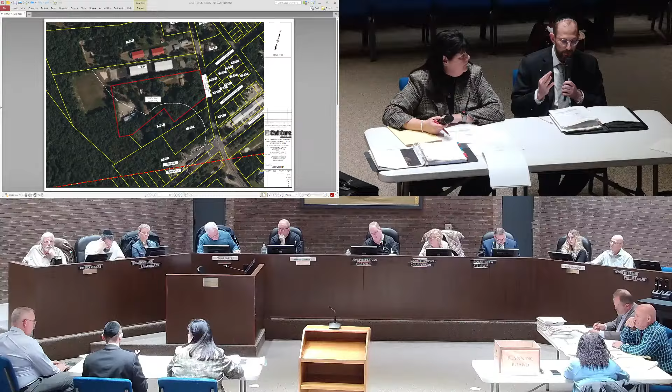As noted, since this is within the Pinelands area, a letter of interpretation does not apply. A letter of interpretation is issued by the NJDEP, Department of Environmental Protection, to verify wetlands, but that only applies outside the Pinelands area. The Pinelands has jurisdiction over the wetlands, and they verify them through the certificate of filing.

In the certificate of filing we received prior to this application, there are certain conditions that have to be met. Yes, and the applicant will meet all those conditions before receiving final approval. After we submitted to Pinelands, we received a certificate of filing, an inconsistent certificate of filing. They issue that when they feel your plans are substantially conforming, and the last remaining items can be cleaned up later. So they won't issue an inconsistent certificate unless whatever is left is relatively minor.

The process is they then direct you to proceed to the local municipal and county boards. After the project receives municipal and county approval, you return to Pinelands to finalize the outstanding items, and the approval cannot take effect until we receive a letter of no further review from Pinelands. It's not even possible for Pinelands to accept an application right now for those items. So it's inconsistent, but we remedy that after any other approvals.

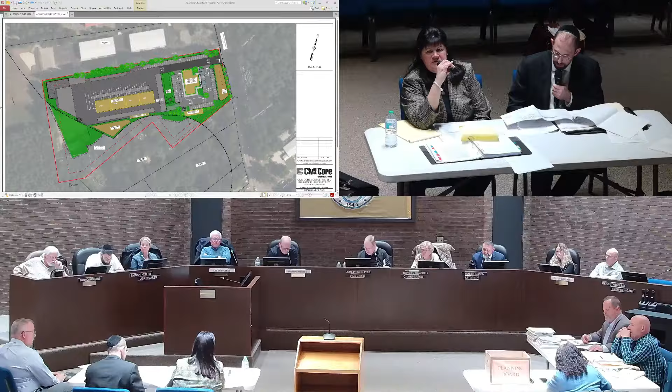Thank you. When we do, can we verify what, if any, utilities are in those? And I guess from your planner or some witness, if they're expected to be considered accessory structures to the principal uses on the site? Yeah, the storage shed is supposed to be accessory to the office building, and the pipe shed is accessory to the warehouse. It's expensive pipes that are in there, so they don't want them mixed up with everything else - that's what's special about that.

In terms of utilities, the pipe shed, I don't believe that has anything. The other shed, I think, will have lighting in it. I don't believe it has any other conditioning or anything. We can have the architect also answer that question.

Mr. Clee? Just quick - up the microphone please. I'm sorry, thank you. The environmental impact statement - do we have the preparer of that document, Mr. Dubois? No, they're not here. So, any questions about the impact statement?

I can try referring to it. I was not the one that prepared it, so it depends if it's something I'm qualified to address. I'm just more questioning threatened and endangered species. This is within the Pinelands, and the Pinelands regulates threatened and endangered species very heavily. They regulate not just within wetlands like the DEP does - their method of enforcing threatened and endangered species protection is through wetland buffers. For example, typically you have a 50-foot wetlands buffer, but if there are threatened endangered species, they extend that to 150 feet to provide protection, and that's really their only mechanism. Pinelands, on the other hand, can regulate what we call uplands - areas outside of wetlands - for threatened and endangered species.

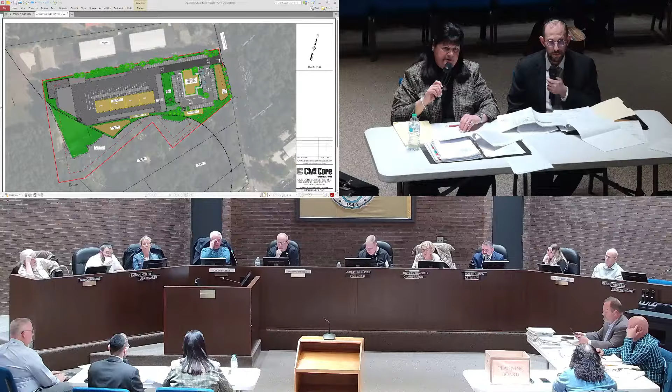I would have to bring that specific person here to answer that question. I can't answer that — I'm not qualified. Understood?

Just to be clear, this application is going to be conditional upon a no further review letter and a no call-up letter by Pinelands, correct? Right. All of this type of information is within the jurisdiction of the Pinelands, not this board.

Specifically, this application is going to be conditional upon Pinelands providing a no call-up letter and a letter of no further review, correct? Correct. So we wouldn't be able to put a shovel in the ground without Pinelands signing off. So any inconsistencies have to be taken care of. Correct — just like every other outside agency that has jurisdiction over the site, we can't do anything even if you guys say A-OK.

And will there be a public meeting about this particular application? Is that what happens at the Pinelands Commission? No, Pinelands only holds a public hearing if there's an inconsistency we weren't able to remedy and we need a waiver. As long as we can satisfy Pinelands, that's our goal, without requiring that. But if there's something we cannot resolve, then there would be a public hearing.

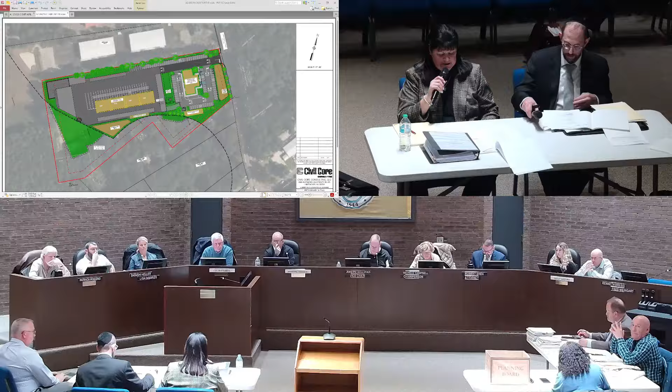Thank you. At this time, if we could bring up the traffic engineer, who is switching hats, so instead of John Rea, we're going to have a special appearance by Scott Kennel. He's been here before, maybe once or twice. He knows the territory.

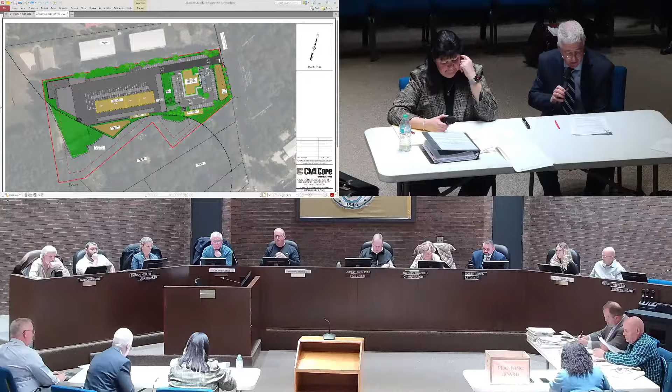Please raise your right hand. Do you swear or affirm to tell the truth, the whole truth, and nothing but the truth? Yes, I do. Please state your name and spell your last name for the record. Scott Kennel, K-E-N-N-E-L, with McDonough and Rea Associates, located at 1431 Lakewood Road, Manasquan. Testifying as traffic engineer, we accept your credentials as usual. Thank you.

And if you could, Mr. Kennel, just for the record, could you confirm that your office prepared a traffic report dated January 14, 2025? Yes, we did. And if you could go through that report and indicate for the board your findings and conclusions. Yes, so again, we submitted a report dated January 14, 2025. As part of that, we did an inventory of existing traffic conditions and roadway conditions in the area.

We have access out to Whitesville Road, also County Route 527, which adjacent to the site has a north-south orientation and a posted speed limit of 40 miles per hour with one lane in each direction. Traffic counts were conducted in the area in November of 2023, during the morning peak hours from 7 to 10 a.m., with the peak hour being 8:45 to 9:45 a.m. In the afternoon, we inventoried traffic volumes from 3:30 to 6 p.m., with the peak hour from 4:15 to 5:15 p.m.

During the morning peak hour, the two-way traffic flow along the site frontage is approximately 1,460 vehicles, and during the afternoon peak hour it's approximately 1,400 vehicles. As far as traffic generation...